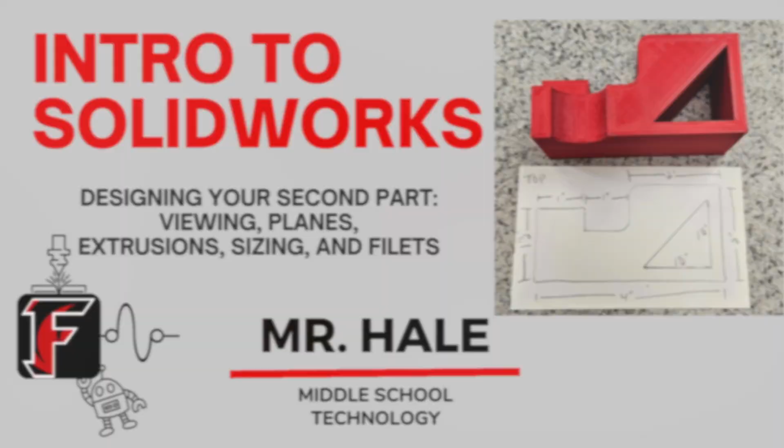Today we're going to design our second part. That second part is going to look like this. We're going to be using a lot of the same features that we used yesterday: extrude boss, extrude cut. You may also notice that we have some curved parts right here. These are called fillets. We're going to add some fillets in this.

So what makes this a little more difficult is that we have essentially a floating block right here. So it's not all on the same plane. We're not just cutting holes through it completely. You notice that this hole cut right here is on a different plane.

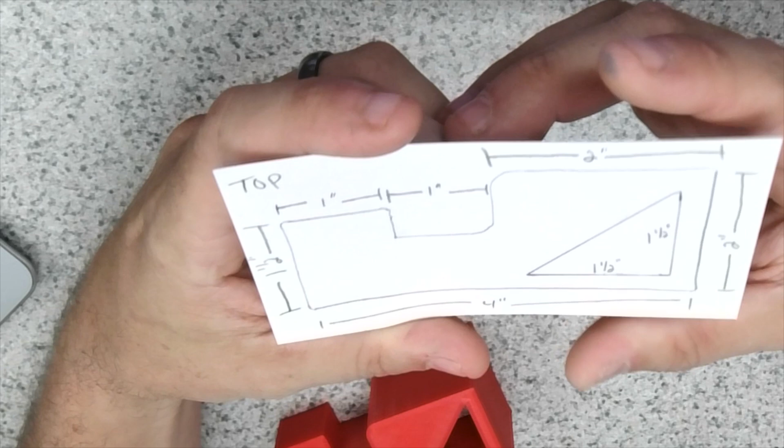So what I chose to do first, and this is something I'm going to have you do an assignment here in the near future, is I took this piece, and this was created using some pretty basic measurements. Let's see if I can get the focus here. Quite a bit of a glare. That's not great, but you get the idea of what I did here.

So I set this block on top, and I traced around it, and then I measured. So all of these dimensions in here are either a full inch or a half inch, just to make this design a little bit easier to create. So as I have this here, let me see if I can get the glare off of it so you guys can see it a little better. There we go, that's better.

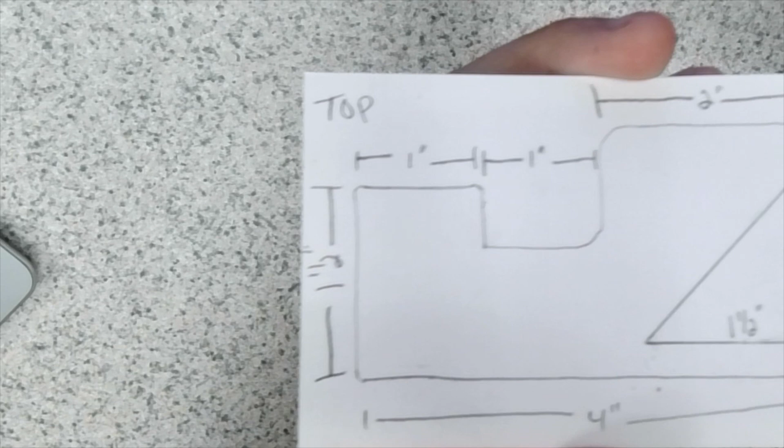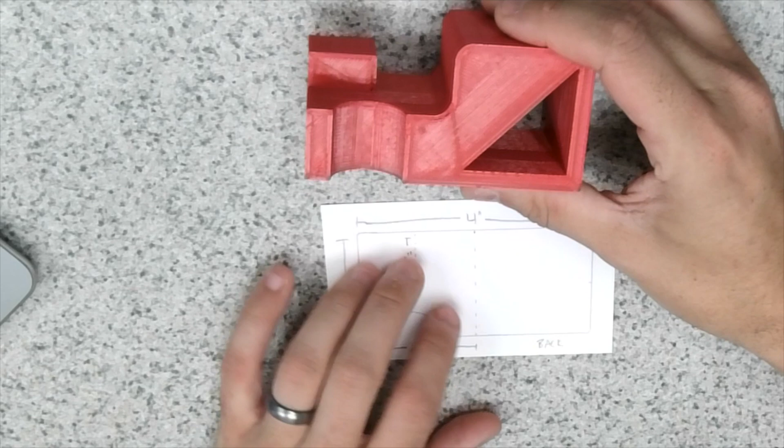So I have this traced here. Now this is from the top view, which is what we're going to start with. We're going to be doing the main, we'll call it the base, the large portion of the rectangle, the largest part, and then we're just going to start cutting some holes out of it. Okay, also, what I had to do is I had to flip this. So that way we can look from the top down, and I have these measured out as well.

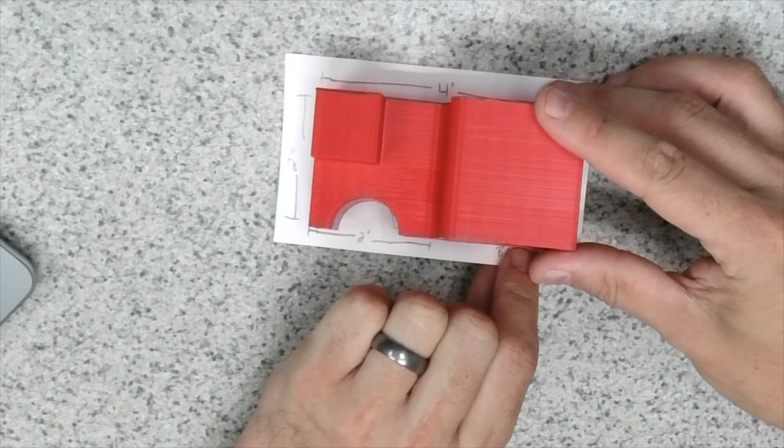Okay, what you can't see, there it is right there. I put a little dashed block. It's a 1 inch by 1 inch block. That's going to be this little floating block right here. So these are the dimensions that I'm going to be working with when we do the tutorial today.

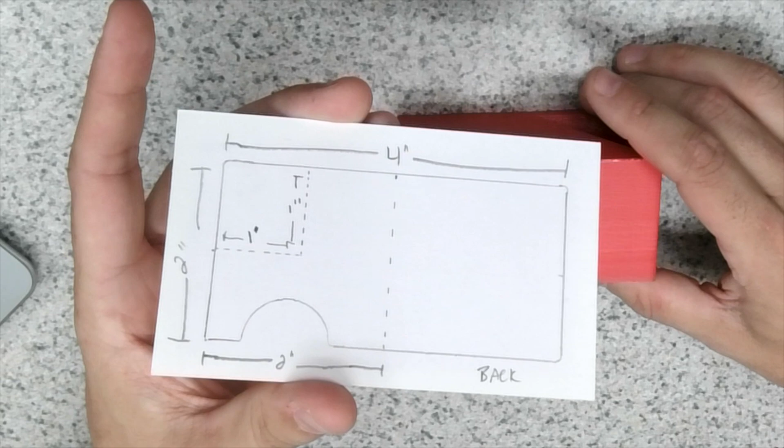But just to give you an idea how I started, I took a note card, I traced it, I measured it, and I knew that this design was created using some precise measurements, meaning 1 inch, 2 inch, half inches, and so on. So I measured it knowing that that was roughly going to be the numbers that were used if I got close. So now we're going to jump into SolidWorks, and we're actually going to create this, do some rotating.

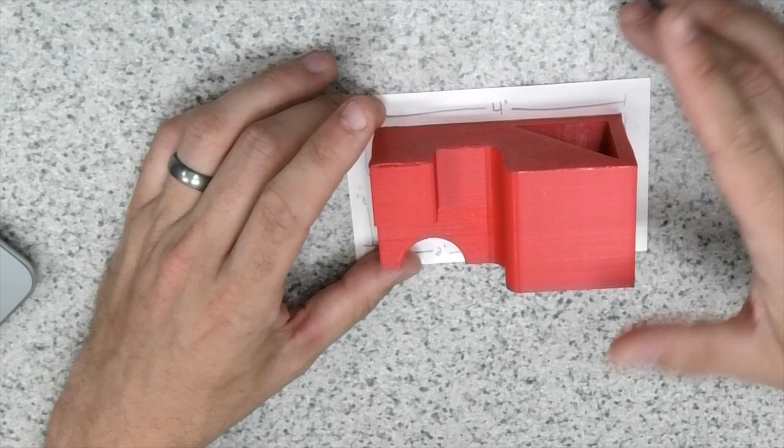So once again, just like yesterday, if you are struggling to follow along with the steps, rewind it, go watch it. Do not just play the video straight through. That's not very helpful. So I suspect that this video is probably going to be a little bit longer than yesterday. Definitely doable to get done in class today, as long as you're pausing and not getting too far behind the video. All right, so here we go.

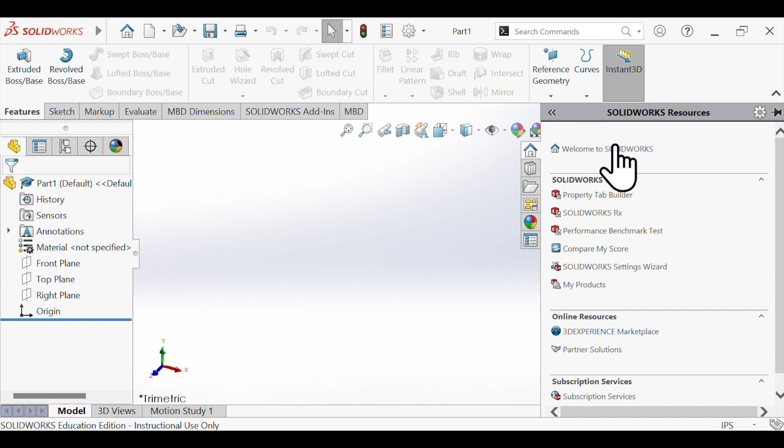We're working on part 2 today. So remember, we're going to go in to do part, just so you're aware the difference between these. So these are drawings, obviously, as you can see. Those are two-dimensional. Assembly are multiple pieces that are assembled together that actually function and move, but we're still working on designing individual parts. So we're going to click on Part. And if you have this menu that's popping up, as long as it's not pinned using this little pin here, when you click on the drawing here, it will go away.

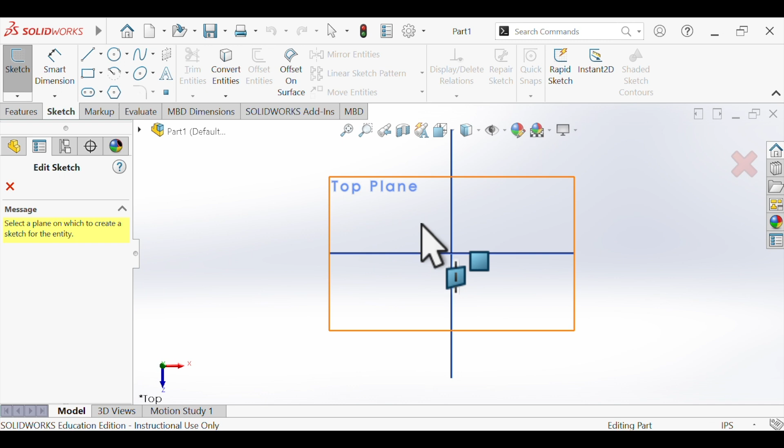So the very first part that we are going to design from the top. So let's go back into, you see it says trimetric here. Let's click on the green arrow. So we're looking down from the top. And we're going to start by simply sketching a rectangle. It's going to say choose which plane. Yep, top plane. Great. So as I draw this, this is going to be 2 inches by 4 inches.

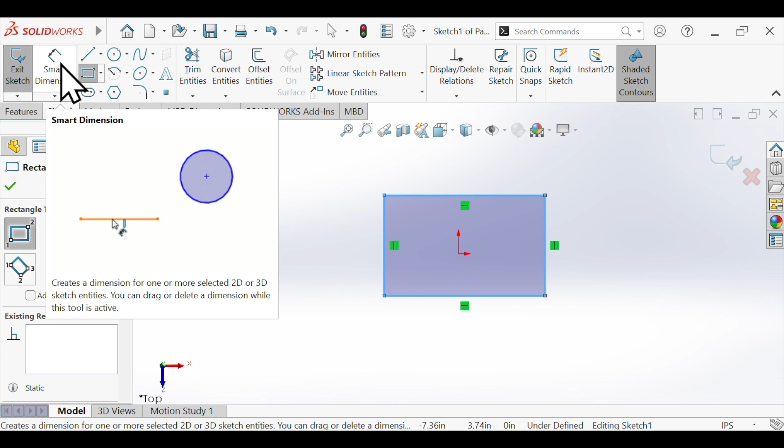So if we get exactly close, we don't have to do any of the smart dimension. But let's just say I draw this like this. This is a reminder from the last lesson. Smart dimension is actually pretty simple to use. So this is going to be 2 inches. I saw smart dimension selected, drag down, click, 4 inches. Great. So there is my base.

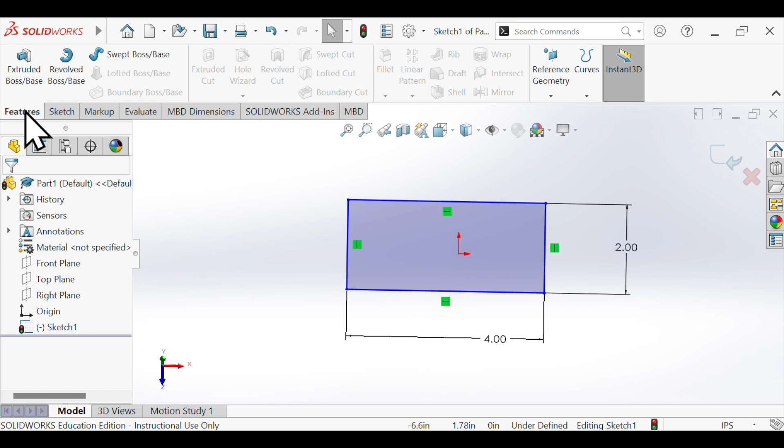Now from my drawing, I know that this is 2 inches in height. Okay, so I'm going to go over to Features. I'm going to do an extruded boss, and I'm going to make this 2 inches. Now just a reminder, blind, what that means is you can specify how deep you want things to go. I'll talk about this here shortly when we start cutting some holes and how that makes sense.

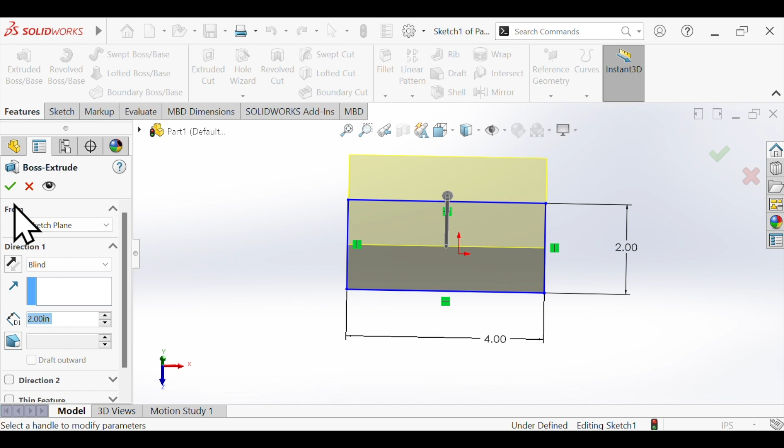Alright, so we have our extrusion. Okay, I can either right click and click OK here, I can actually click the green check box over here, or I can click this green box over here. All of them will do what we need to do. Great, so there is my base rectangular prism.

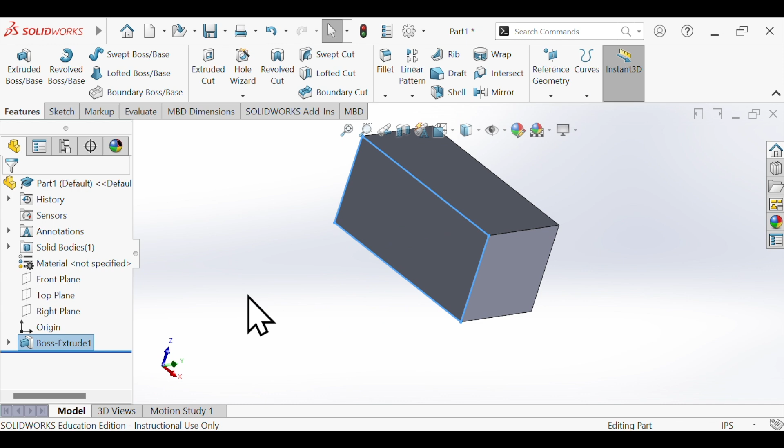So remember, if we get this all mixed around and we don't know where we're going, simply click on the green arrow and we're back.

Alright, so the next step is we want to cut out a 2-inch, 1-inch rectangle up here at the top. So let's go into Sketch. I'm going to pick a rectangle. It's going to say, hey, what plane do you want to use? And we say we're going to use this plane.

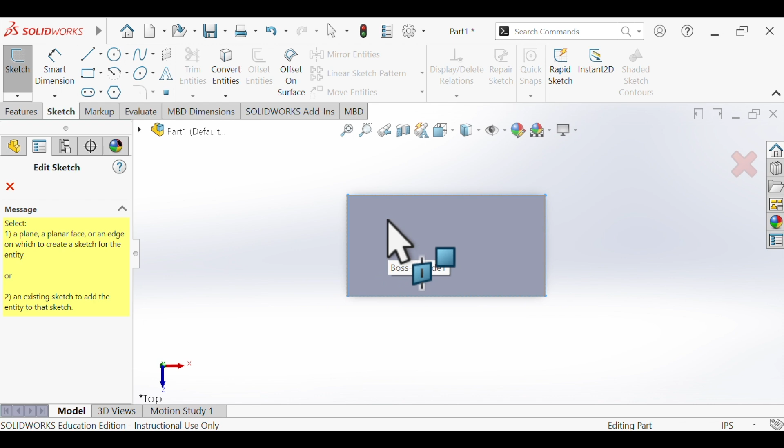Solidworks says OK. Now what you can do to make life a little bit easier too, is if you have that plane selected, might be hard to see, but if I'm pointing right in the corner, I get a little goldish yellow dot, a mark point. I can drag this out and pay no attention to those red arrows. Those are not the center because I didn't draw it from the center.

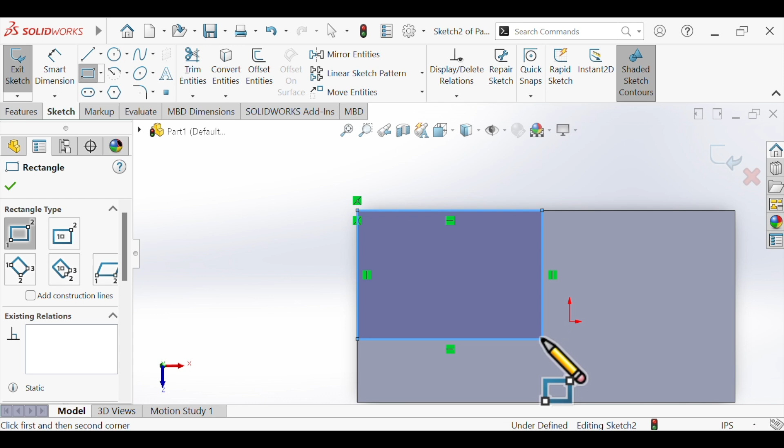But once again, let's go from there to there. Smart dimension, okay, this is going to be 2. Great. And smart dimension still selected, this is going to be 1. Great, so there we go.

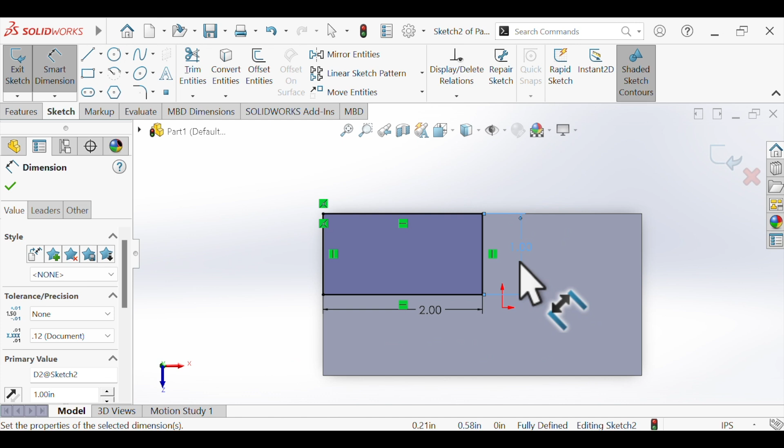Now that I have this selected, I can hit check, or I can right click and hit select. That way it takes me off of the smart dimension tool. And I'm going to cut this, I'm going to cut this whole chunk out here. So we have it selected, Features, Extruded Cut.

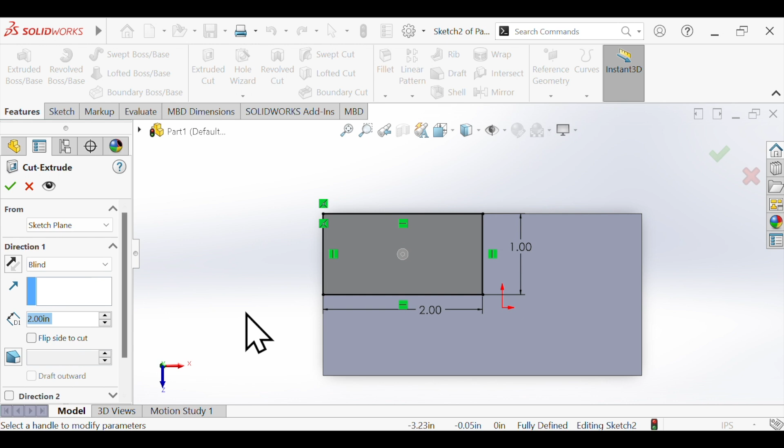Now this is what I mentioned to you earlier, how we can choose - let me rotate this so we can see. There we go. We can choose blind, which in this case makes sense because we know it's 2 inches. But we also have some other choices here. We can cut through all. We can go up to next, up to vertex. So these are all things we're going to be working on or using in future projects.

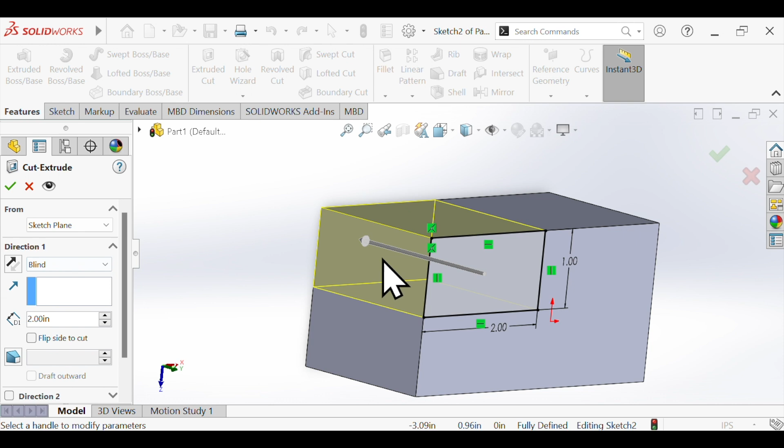Essentially going through all would make sense here. And what happens here is that if you have a very long project and you want to cut a hole straight through it and you don't exactly know how long it needs to be, you can go through all. Okay, we're just going to simply leave this as 2 inches. That cut looks good. Checkbox, and off we go.

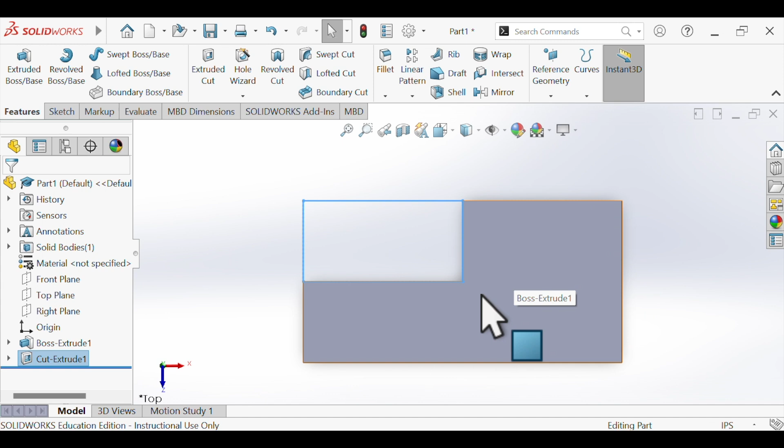So now let's go back to the top. We are there. And from the top-down view, the only part that I really have next is I want to cut a triangle over here. And I'm going to show you a little bit of a tip on how to get that to be centered in this area. So in order to do a triangle, we're actually going to use a line, a regular line.

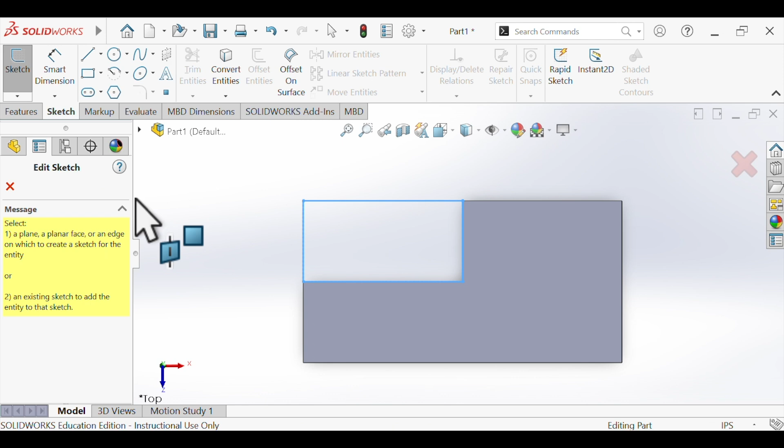Now we can use center lines in order to kind of use mark points. So center lines are more reference points, they don't actually exist in the drawing. But we're going to click line. It's going to once again say, hey, which plane you want? We say right here. SolidWorks says OK. We're just going to start drawing this here.

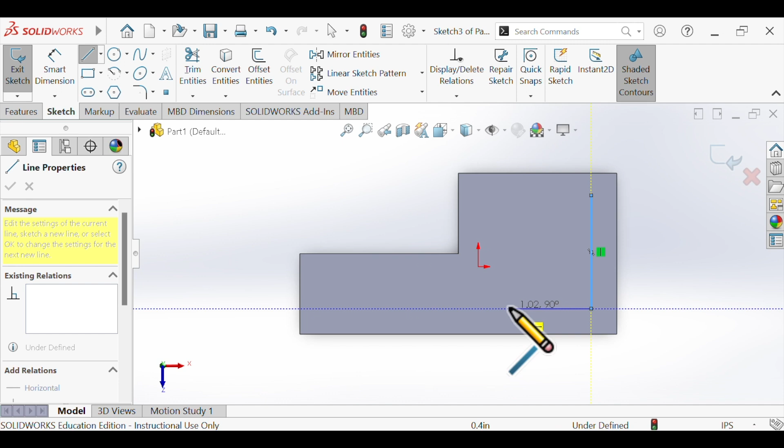And it doesn't have to be perfect because, again, we can use Smart Dimension. So I'm going to just click, I'm not going to hold. One click, drag down. What would make life a lot easier, if you see where it goes 90 degrees, okay, it's a little forgiving there, a little snapping. Okay, 90 degrees, we're going to go there. Let's come over, and let's stay on 90 degrees also here. Great, and let's go up.

Now once we connect this top point here, right there, our line tool, we can hit check, and then we have our - whoops, I didn't click it. Check, and then we have our drawing here. Let's once again use Smart Dimension. Drag this down. 1.5, 1.5. Check. Smart Dimension still selected, so let's drag this out, and we'll do 1.5.

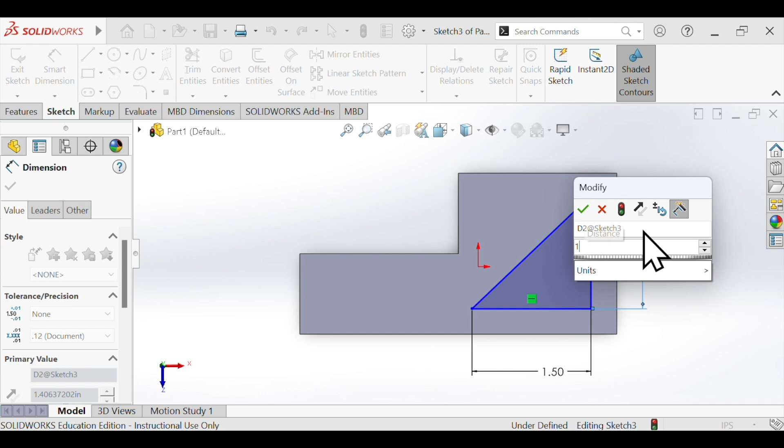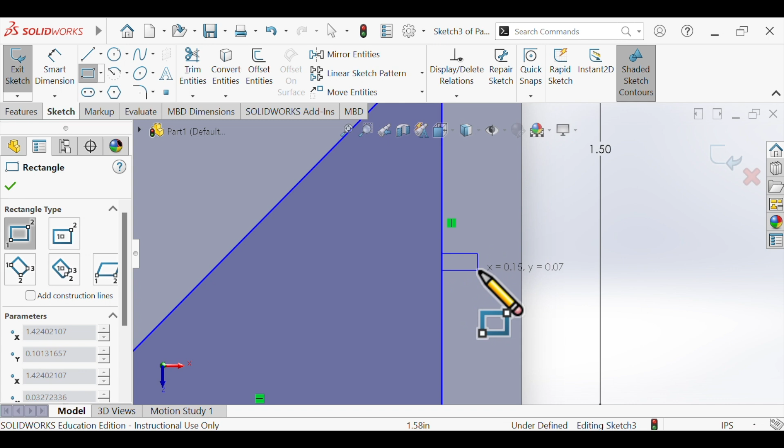Check. Okay, now I'm going to teach you a little bit of a tip here. Let's get out of Smart Dimension. And I'm going to take the rectangle tool. I'm going to zoom in here. And what I'm going to do - you see how when I get close to lines, how they become orange. All right, so I'm going to start here and I'm going to draw this, and it's going to snap. There it goes, so there it snaps. So now I have this piece here that I'm essentially going to use as a spacer.

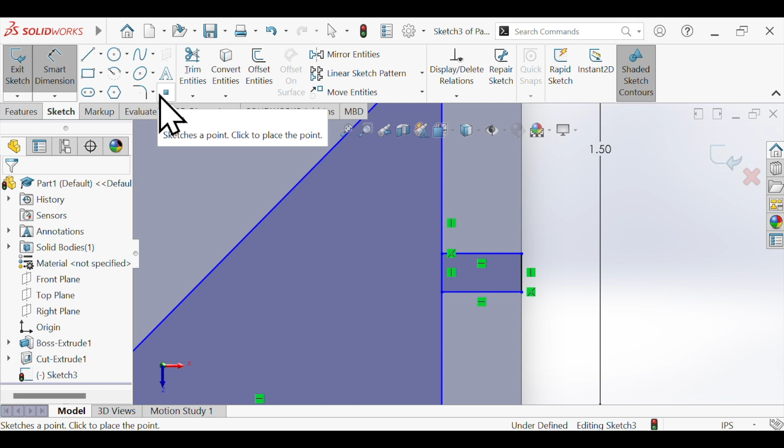Let's hit check. Let's go Smart Dimension again. Now I know from my drawing that these are roughly a 1/4 inch from the edges in order to make it perfectly centered. So if I use Smart Dimension here and I drag this thing down and I go 0.25, watch what happens here. Okay? So it moved along with this block because I connected them together. It realized that this was supposed to adjust the triangle according to this line here on the right.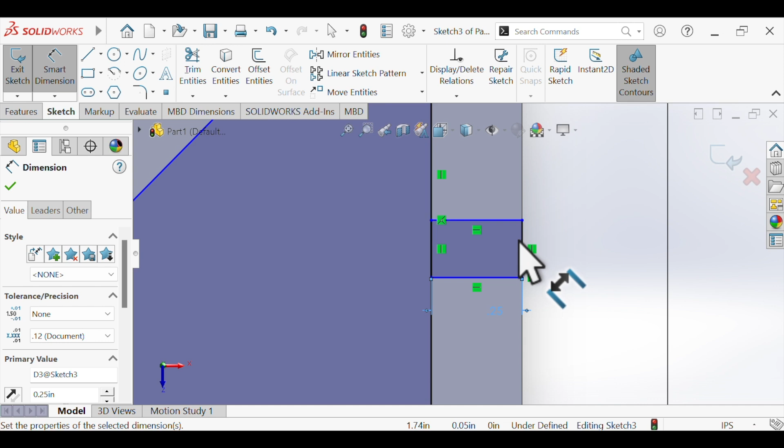Let's do the same thing down here. So I'm going to get out of Smart Tool. Let's go back to our rectangular tool. Go here to here, great. Let's use Smart Dimension. In this case, since we're centering it this direction and it's 0.25, this is the line I want to drag out.

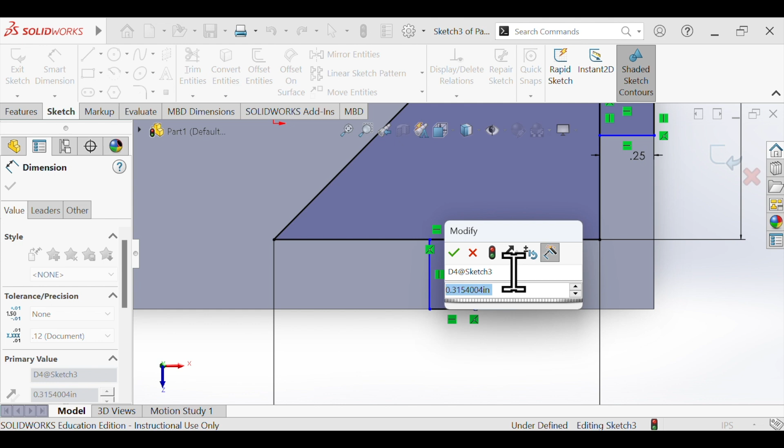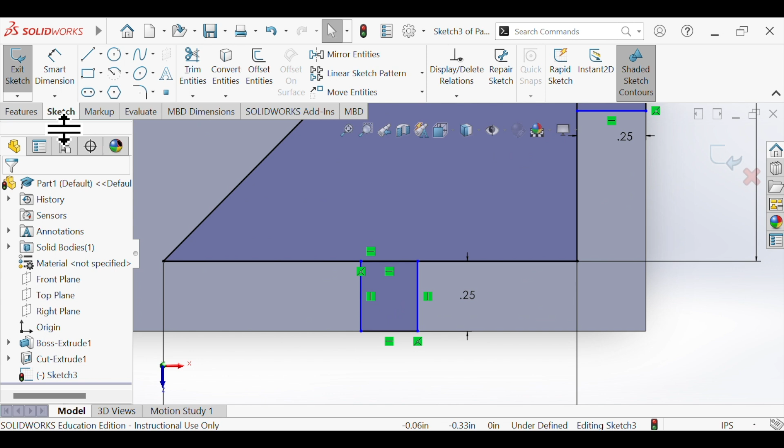0.25. Check. Bingo. Now, what I also want to do, we're not doing cuts with these, so I guess essentially we could leave these, and that's okay. But we don't need them anymore because they're just like little spacers. So if I have it on my regular select tool with the arrow, I click on this square here, rectangle I suppose, we can right click and delete it.

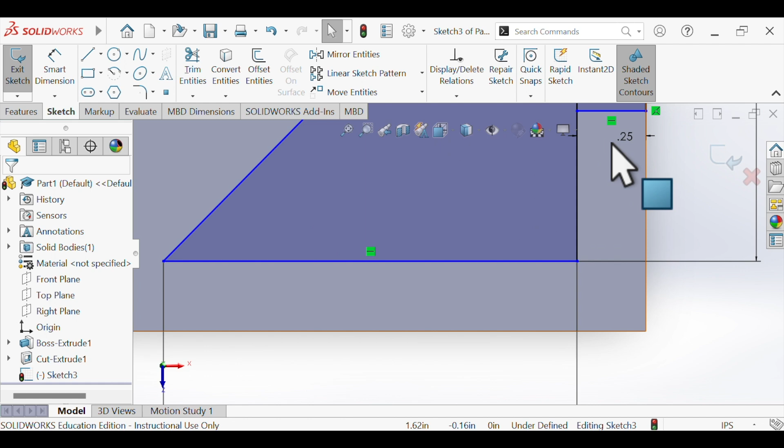It's going to say, hey, hang on a second. This is associated with 2 other shapes. Do you want to delete it anyway? And I'm going to say, yep, sure do. Do the same thing up here. Click on this. Let's right click, delete. Whoa, hang on. Yep, we do. So now I have my triangle there, perfectly centered.

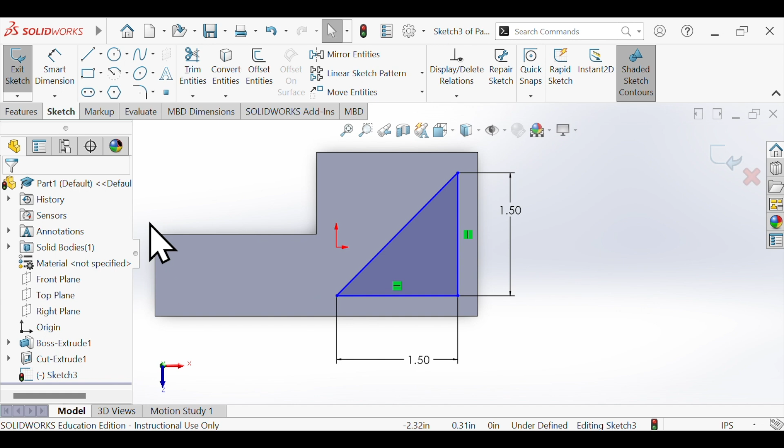Next thing we need to do is we need to cut this, extruded cut. So we have this selected, features, extruded cut, blind 2 inches. Since this is 2 inches, great. Once again, we could go through all, that also works, but this takes care of that. So here's what we have so far. Once again, if you're struggling a little bit, pause the video, watch it again. Okay, so here's our shape.

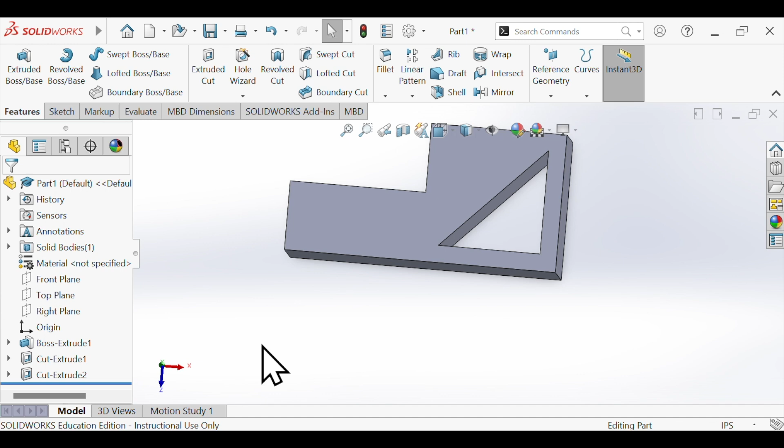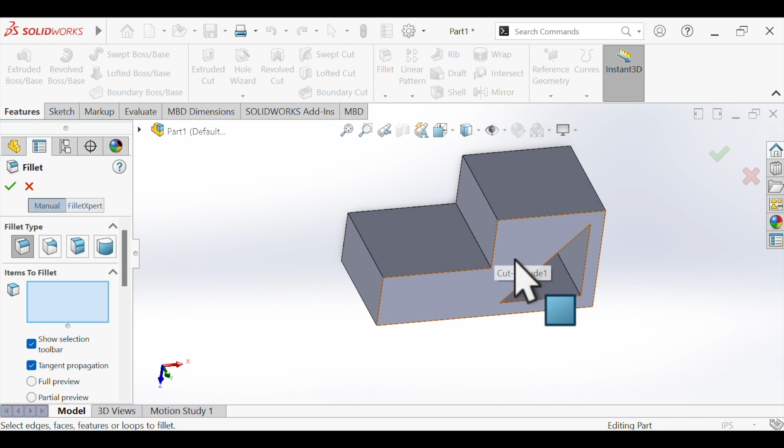The next thing we're going to work on, I'm going to hold down my scroll button, my little rolly ball on my mouse, and we're going to work on making these, which are called fillets. That is up here at the top. So if I click on fillet, there, I then need to point to what line or what area I want to fillet. Okay, so I'm going to click on this line right here.

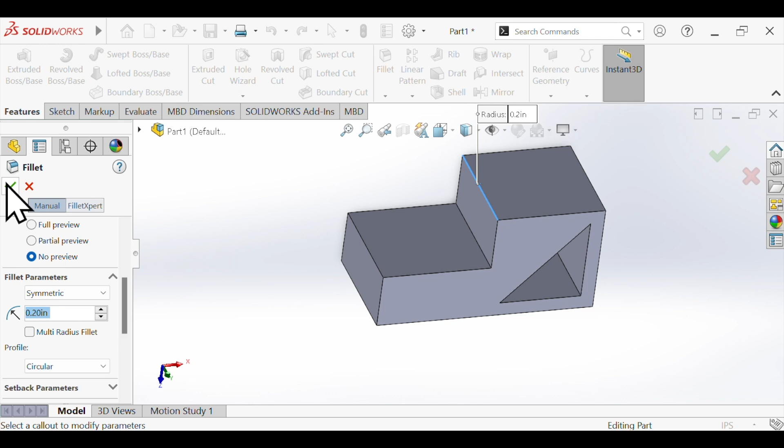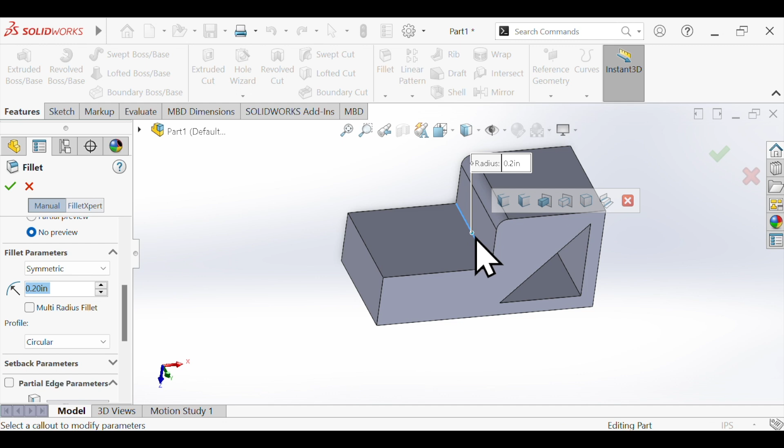Now what is a little tricky, you might think that we can type up here. Not true. We're going to go over here, and we're going to make this 0.2. We're going to go up just a little bit. 0.2, checkbox. Check that out. Okay, fillet. Let's go and do this one. Let's also make this one 0.2. Oh, looks like it already is. Let's try this again. 0.2. Check. There we go. So now we have our little bit of our curve here.

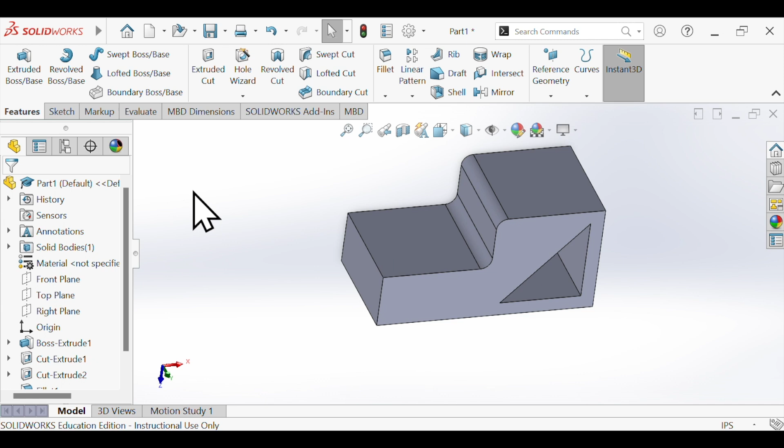We have 2 more items that we need to add to this. We need to put a cutout semicircle here, and we need to extrude a cube up here. Now according to my dimensions, this is a 1 inch by 1 inch cube that's raised 1/2 inch. Let's do that one next. Alright, so let's just simply rotate this. If you want to just rotate this down, that's okay too, because when we select this plane in order to draw that extruded little cube on it, it's going to ask us what plane.

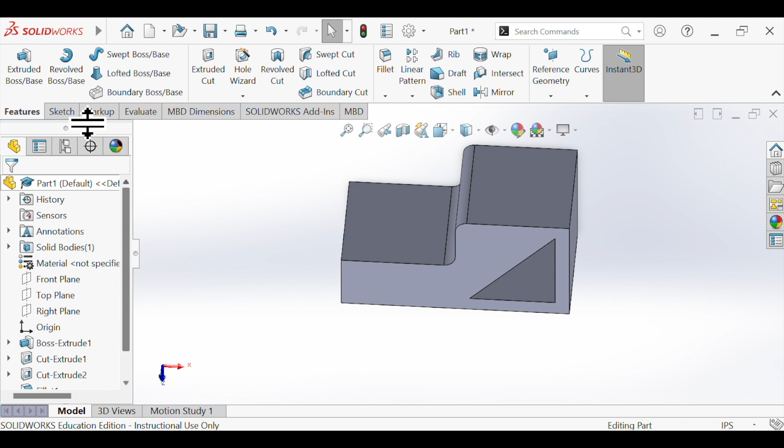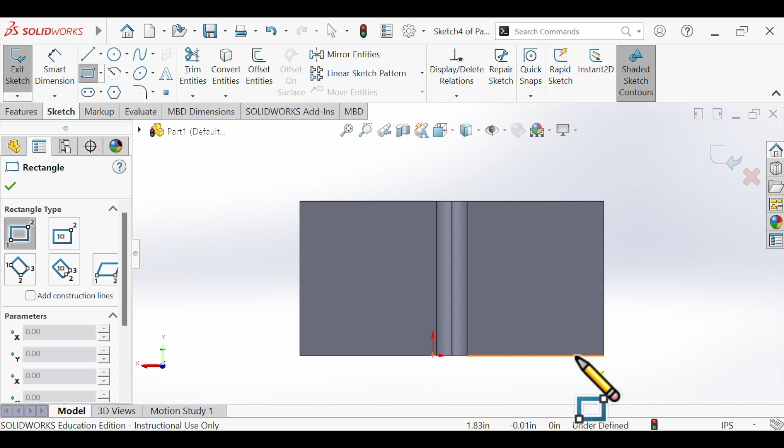So let's go to Sketch. We're going to click on this, and once again it says, hey, 1 second, what plane do you want to use? And we're going to say we're going to draw this thing right here. Make sure you have the proper one selected, otherwise it's going to be confused drawing off the bottom. So here we go. Let's click on that. Oop, it flipped us around. That's okay. So in my drawing, that cube is going to be right here, and that semicircle, now that it's rotated around, is going to be here.

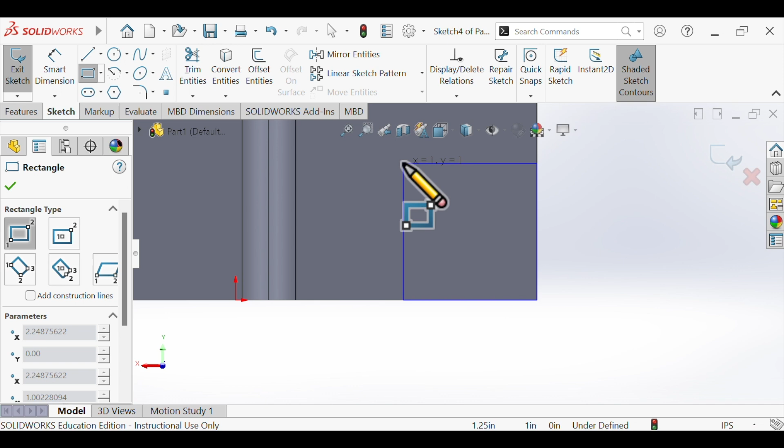So if I were to zoom in, I get a little point here. Let's drag this up. Let's get as close as we can to 1 and 1. See how close I can get. There it is. That way I don't have to use Smart Dimension to resize it. Rectangle. Done. We can either click checkbox here, or we can right click, hit select, and bingo. So now we have that little square here.

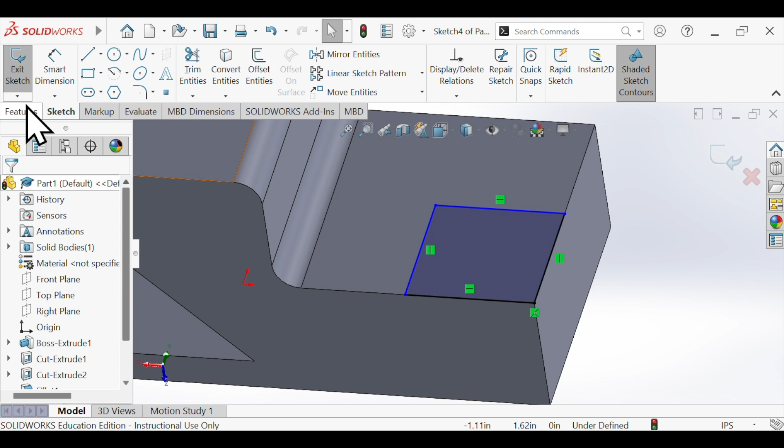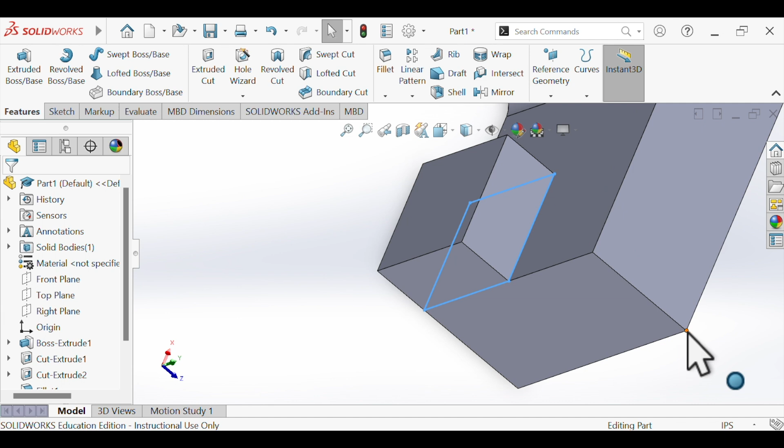Since we are growing this upward, we're going to once again use extruded boss. It's saying 2 inches, and we're going to say no, not 2 inches this time. We're going to go 0.5. Check. Great. And now we have this part right here. Zoom out. Last piece we need. We're going to cut a semicircle here, and we're going to make that perfectly centered on this line right here.

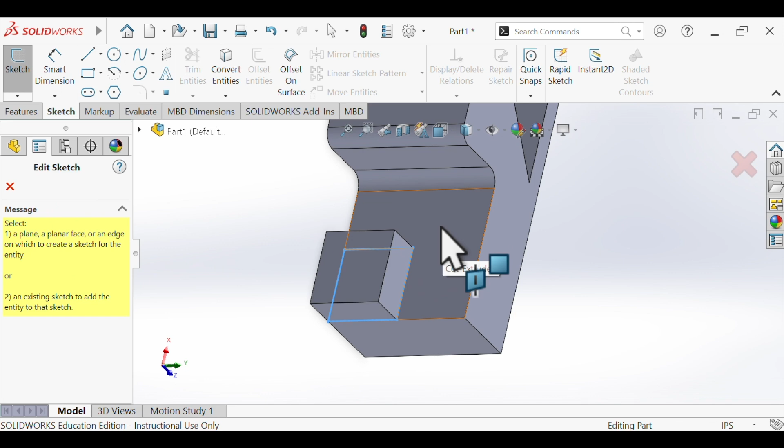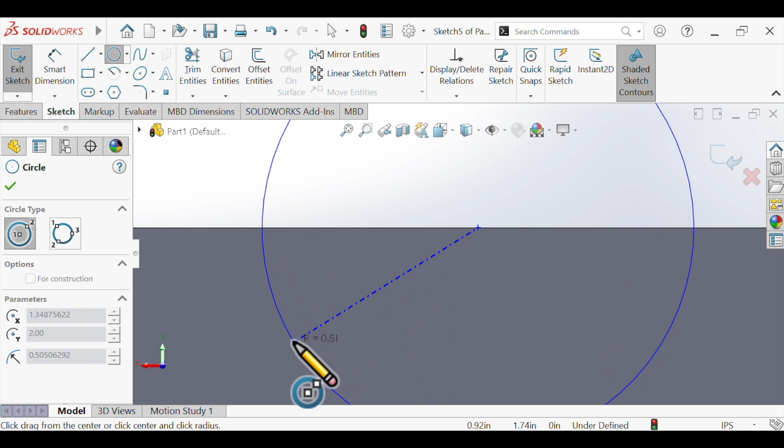Okay, so let's go into Sketch. Let's draw a circle. And it once again says, wait a second, what plane? We say we're cutting through this one. And on this one, if we get close to the center point, you see it pops up. I don't know if you can see on the video, little yellow, gold marker. We're going to click on this, and we're going to make a 1-inch circle. Now, a 1-inch circle has a 1/2-inch radius, because radius is half of a circle. There we go. Check.

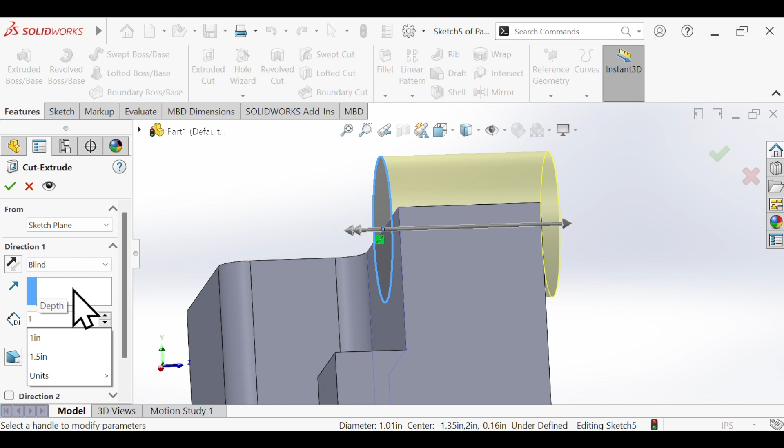Let's cut this thing. Once again, how deep do we want to go? Let me zoom out. Not far enough. We can drag this out if we want to. That's fine too. Or we just know that this is 1 inch, so we can type it in here. Or, once again, we can say let's cut through all. All of those options work. So now let's get back to our top view here. Great. We are done. Take a screenshot of this using your snipping tool. Upload it for today's exit ticket.